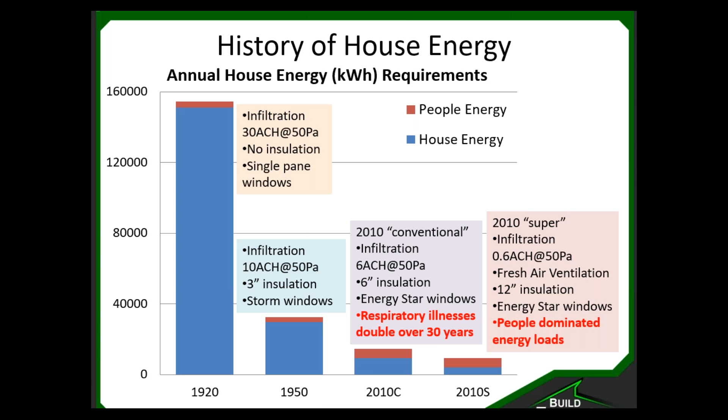Just briefly, and you'll find a lot more literature on health and productivity in our other reports, writings and presentations, but if all 100 million or so homes in the US, with roughly 325 to 350 million people, were efficient homes, and there's a lot of work to get there, the energy they would use per year would be about $160 billion per year, about half that for people, about half that for climate.

If we compare that to the costs of getting sick from the flu or from colds, or what asthma currently costs us spread over the populace in the United States, and then even more so poor air quality, which is pervasive in our homes. It is a myth that a leaky home is a healthy home, that it has good air quality.

Where the leaks occur and where you live are two different things, and our field research absolutely shows that where you live in a house, even if it is a very leaky house, most likely in the room where you're sleeping or spend the most time, the air quality is not good. Where it's good is in the laundry room or the mechanical room or the basement or somewhere else that has a significant amount of leakage.

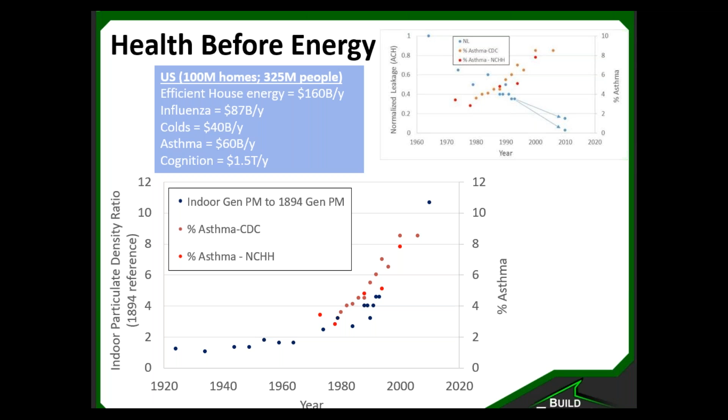And when we layer on a plot of how asthma has increased in our populace in the United States, since those records have been kept in the 1970s, we see that this trend maps out in direct proportion with that. And while we don't understand the direct cause, I think this correlation is very strong, indicating the importance of getting fresh air to keep ourselves healthy, and that these costs are every bit as significant as the energy costs that we'll talk about in this.

Now, one of the problems that we find as we do workshops and training sessions on designing homes is that it's complicated and it's hard to figure out where to start. Some people will tell you, just start working on the house, make it very well insulated and sealed, and don't worry about the other stuff. Do that first, independent of all the other things. But that is absolutely the wrong approach. The house is a system; in order to economically optimize it, you must consider all the factors simultaneously.

The type of water heater you put in, the type of appliances, the type of windows, the amount of insulation, the type of heating and cooling system. All of these things impact the optimization process. A house with electric resistance heating will have, when it's economically optimized, a different level of insulation thickness than a house that uses a heat pump. Why? Electric resistance heaters typically cost much less than a heat pump. A 1-ton mini split heat pump costs about $2,000 these days, while a similar capacity electric resistance heater you can buy for maybe 20 bucks at Walmart.

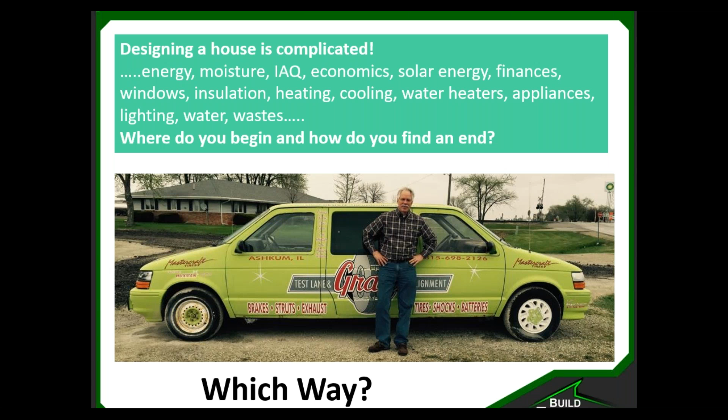So here's the 7 steps that we're going to be looking at. These steps are something that we've simulated in our Zeros modeling program, which stands for Zero Energy Residential Optimization Software. I'll talk a little bit more about Zeros. It's free software that we've developed over several years, and it's free to use. But regardless of using Zeros or some other software, whether REM rate, PHPP, Energy Plus, you can follow these same steps.

In the 7 steps, in order to have some perspective of where we're starting and where we end up with our net zero house, we're going to start with a conventional house. And because windows are a complex feature, letting heat pass in and out from winter to summer, as well as the radiation effect, let's look at what a house would do with no windows, and then if we covered the south facade of the house with windows. The real answer is somewhere in between, but we'll keep those in mind so we see energy performance wise as well as dollar wise. And I think some of you may be surprised, as many folks have in mind that windows are economic benefits to a home.

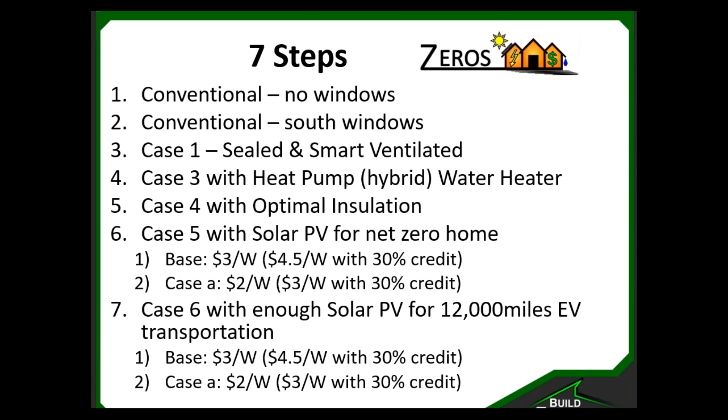My house, what we call Equinox House, we'll look at a few features of it. The name Equinox House: this uprising overhang on the 6/12 pitch roof where the clerestory windows are, on the equinox, and within 2 weeks of the equinox, that overhang edge goes, in the spring, from allowing full direct solar radiation into the main living area and master bedroom area of the house, to totally excluding the direct sunlight.

And the direct sunlight is about 85% of solar radiation on a clear day. That 15% blue sky light that comes in from the spring equinox to the fall equinox, when the direct sunlight's excluded, that's more than enough to daylight the inside of this house, and to make it so that you can comfortably read throughout those rooms in the house.

This house has less than 10% window to floor area. It is one of the best daylit homes, if not the best daylit home I've ever lived in, as well as walked through. And it does it without glare. It does it without frying you somewhere in the house. It's just very comfortably daylit.

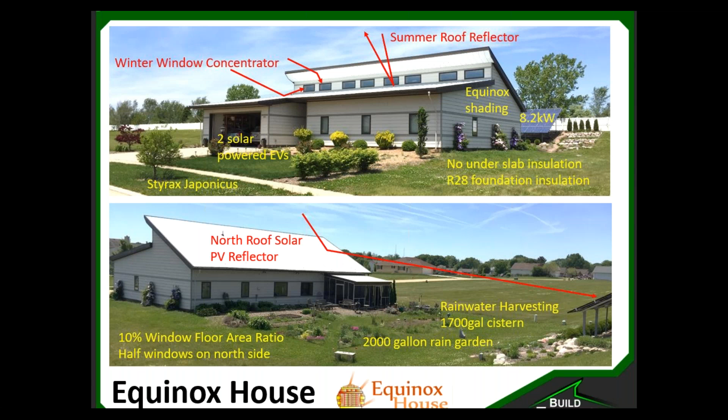And as I mentioned, we have 10%, 2,100 square foot house, 180 square feet of windows, and the house is wonderfully daylit. And then we have as much north-facing window as we have south-facing window, and that's because our gardens and the direction we want to look is to the backyard.

Now, what I'm telling you and the steps that we're following, I'd like to say that we're innovative and this is new, but you can go back to the 1970s, and at the University of Illinois, the Small Homes Council and Building Research Council developed what was called the Illinois Lo-Cal House. This is really the origin of many other super insulated homes to come, such as the Passive House, which as you look at their archive material, you'll see that this was definitely a house that they referenced.

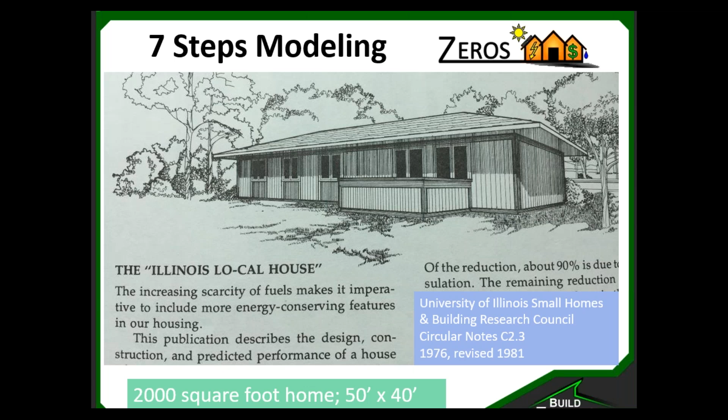And what we're going to model looks very similar to this simple ranch home, about a 50-foot by 40-foot, 2,000 square foot home as we move through these steps. This is a Lo-Cal house in reality. This is in Urbana and was built in the 1970s by my colleague, Michael McCulley. And he designed this house. And just a couple of years ago, I stopped by and talked to the residents who just thoroughly love the home and have loved very, very low utility bills ever since they've lived in it.

Aesthetics are important. Our expectations in what we would like in a home. We do like to see out. We do like daylight in a home, and those things are important for us. And so even though a window may not turn out to be good from an economic balance, just like many other things that we buy, it's something that we like, and we should be able to have it if we can afford it and if we want it.

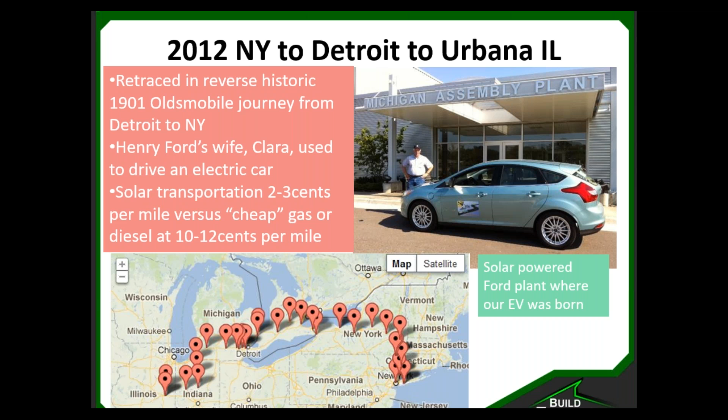And this car cost about $40,000 at the time, now moving down to about a $30,000 cost. Just like flat screen TVs, it's going to be less expensive than the thousands of parts that are in an internal combustion engine. And as a native Detroiter, I think this is going to be good for our industry and our overall economy, as well as our pocketbook economy.

The solar system for Equinox House is an 8 kilowatt system. And just a couple things on that. It cost about $4.50 a watt to put it in then. Now you can put it in for $3 a watt. And if you're a do-it-yourselfer, you can do it for $1.50 a watt. This 8 kilowatt system, about 700 square feet.

It produces about 10,000 kilowatt hours a year, about 8,000 for the house, and about 2,000 for the car. And the current generations of electric vehicles, you get about 3 to 4 miles per kilowatt hour. So 2,000 kilowatt hours is going to give us about 6,000 to 8,000 miles of driving a year. And you can see roughly how that proportions over this photovoltaic system.

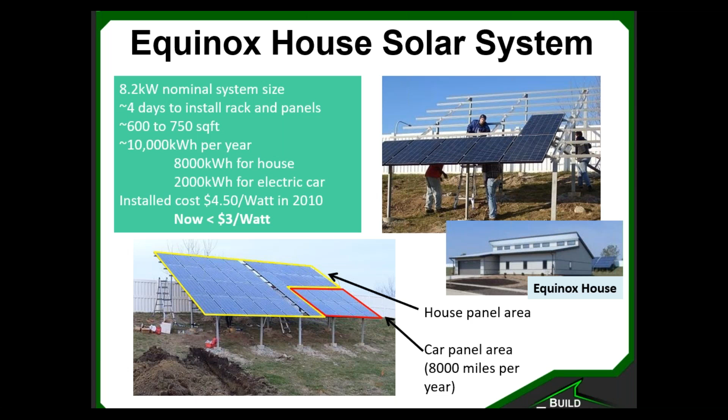There's a lot of student classes, architectural and engineering classes around the country that are using this for zero energy house design modeling. It's very easy to get up and going on. And there's a PDF that follows through these 7 steps in more detail than this webinar, along with a CSV file that you can import into Zeros so that you can actually see all the details of the results that we'll be discussing in a minute.

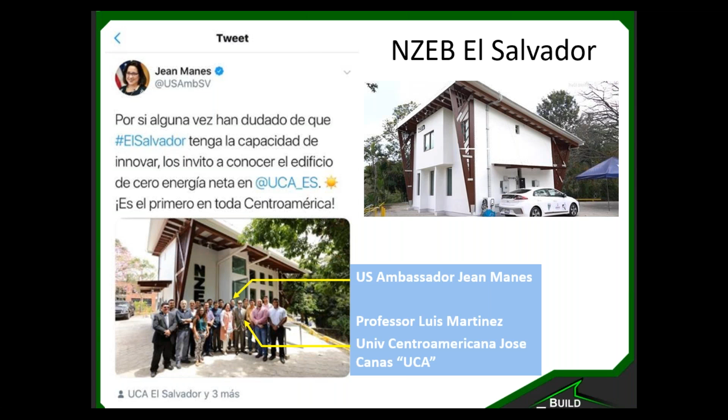And because I'm very proud of Luis, who's now a professor at Universidad Centroamericana in El Salvador, here's a recent picture from just a couple of weeks ago of Luis along with the US ambassador at the net zero energy building project that Luis has been leading at UCA, his university campus. That's a beautiful, gorgeous building that will provide them with lots of data and hopefully help start paving the way to a better future for El Salvador.

Then finally, just simulation versus reality, so you can use Zeros with confidence. These blue dots are the average performance of 13 identical homes. These are manufactured homes, Vermod homes that were built in Vermont and are largely in Vermont. And these homes are averaged throughout the year, with over 2 years of data collected. It takes a lot of time and a lot of data to be able to statistically average so that you can compare with a simulation model.

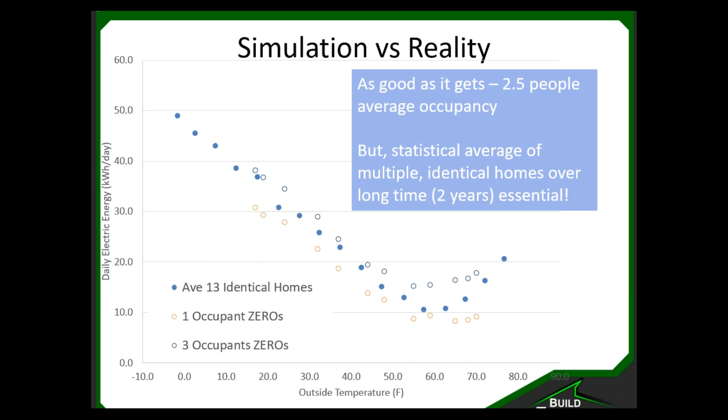And if we run Zeros with 1 occupant versus 3 occupants, you can see that 3 occupants increases the energy usage. And the average of these 13 homes was about 2.5 occupants. So you can see very, very good agreement between the daily energy requirement in kilowatt hours per day versus outside temperature. Just looking at when it's 20 degrees out, one of these homes would use maybe 30 or so kilowatt hours per day. We're talking about $3, $3.50 worth of energy, the price of a cup of coffee. So these homes use very, very little energy, and we can predict it very, very accurately.

I also, though, want to point out one of the problems when you look at comparisons between simulation models and data. This is what that data really looks like, all of these solid points. The yellow points are the simulation predictions. If I happen to compare the simulation to one of the very low energy usage homes, I might reach a different conclusion than if I used one of the homes that uses quite a bit more energy.

And so all of those data points are what were averaged at a particular level of temperature to give the previous plot. And in perspective, those open circles that go up sky high are performance values for conventional homes, just showing you how much more energy they use than these Vermod homes, which are net zero energy buildings. So the range of people usage in these homes is very significant, as we mentioned, and on average, Zeros can predict it.

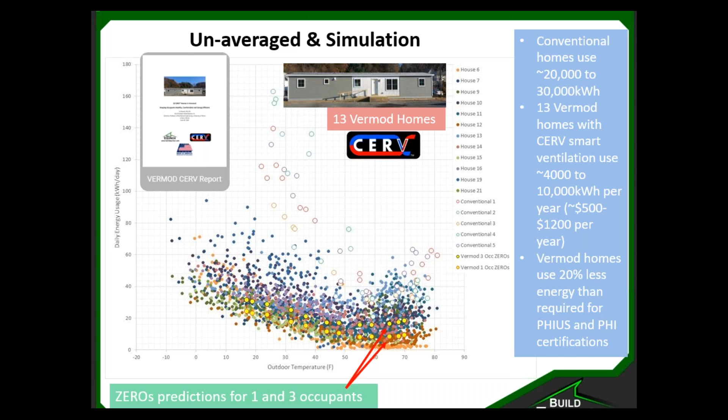This is one of the main output sheets on Zeros, and not to go through much detail on it, but I do want to point out the life cycle cost. So this is for the conventional home that we're starting with, about $412,000 of life cycle costs. That's the cost of the house, which is estimated at about $213,000.

$200,000 of that is the base cost, or estimated to be $100 per square foot cost, which is typical for our area. And then the things related to the energy performance of the house, the cost of insulation, the cost of heating, cooling, ventilation, equipment, and utilities are the other factors that add up to the life cycle costs, along with then replacement of, say, for example, the heating and cooling system every 25 years, that would be replaced over a 100-year lifetime. The red and green arrows are direction arrows to help guide you to optimum levels of insulation thickness in the walls and the roof and window and hot water.

Of course, the less hot water you use, the better. The less electricity people use, the better. The fewer occupants, the better. The thicker the wall, the less energy, but at some point, the higher the life cycle cost. And then other output results related to the heating cooling capacity of the system.

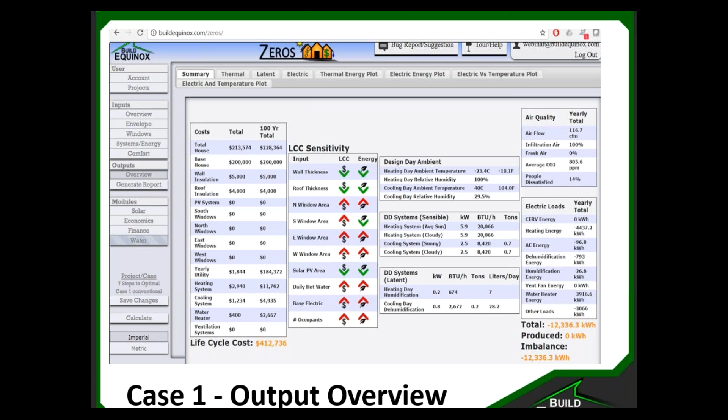So let's look at these results, and so these cases are laid out, and as you use those cases with zeros, you should find these same numbers, and for sure contact me anytime for any questions related to them. But first, starting with a conventional home with no windows, as we just saw on that sheet, we'd use about 12,000 kilowatt hours of electricity, this blue bar. And if we put windows on the south side of that house, which would be 500 square feet of good Energy Star windows, not super windows, but good performing windows, we can see that the energy usage would drop a bit below 12,000 kilowatt hours, but not by a substantial amount, especially for adding 25% windows to the south. And so the reality for, say, a house with 12% windows will be somewhere between those two.

As we seal the house up and then add a smart ventilation system, there is a significant drop, almost 2,000 kilowatt hours just by sealing this house up better. As we add a heat pump water heater instead of an electric resistance heater, and I think I forgot to mention that we have 3 occupants assumed in the house. That's about 50 gallons of hot water per day of usage. And by putting in a heat pump water heater, we see a similar nearly 2,000 kilowatt hour drop of energy per year.

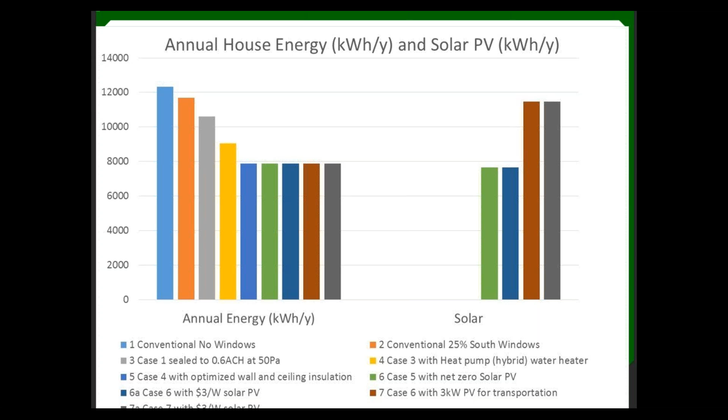As we go to putting in photovoltaics, cases 6 and 7 do not impact the energy performance, but over on the right-hand side, we see that in case 6, where we're just meeting the house electric needs, we're going to match that with a solar system. And if we also want to add about 12,000 miles of driving, we would put in about 3 kilowatts of solar PV, which would give us close to 4,000 extra kilowatt hours per year, and that would be about 12,000 miles of driving.

If we look at the house costs, our conventional home, figuring it would be $100 per square foot, and I know you folks in California and New York and other metropolitan areas are saying, we can't build a house like that. Well, it just scales, but this base house, whether it's $200,000 or $600,000 without any energy features, does not impact the optimal house solution. So that is just a reference cost, and all the energy related items then vary on top of that. The insulation thickness relative to the climate, relative to the cost of electricity and solar panels.

The main thing to notice here, between a windowed house and a non-windowed house, there's a significant cost difference. I've assumed $45 a square foot, and for good Energy Star windows, you might find those at $30 to $60 a square foot. Super windows, maybe $50 to $100 per square foot, things that are reaching like R6, R8 type thermal insulation value. So there's a significant cost difference due to windows. And as I mentioned, pick what you need for the views you want, for the look that you want, and the aesthetics. As we look at life cycle costs, you'll be able to see the impact due to those aesthetic preferences.

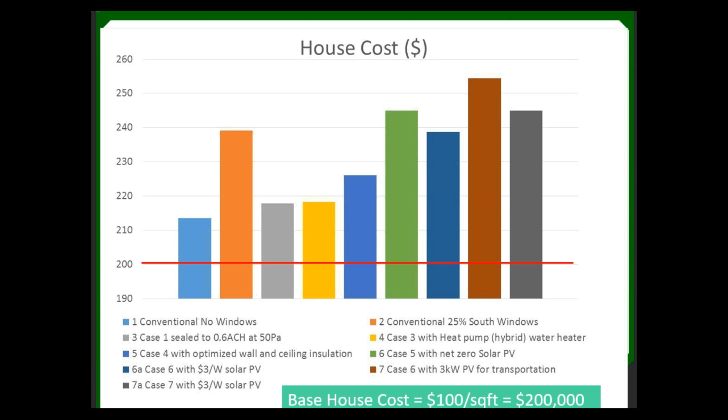And then adding solar. If it's $3 per watt versus $2 per watt, now 6A where I have $3 per watt, that's then with an assumed 30% tax credit, taking it down to $2 per watt. So basically between the green and the blue bar, we're looking at $3 a watt and $2 a watt installed solar cost. And then adding an additional 3 kilowatts for transportation, you can see that our house cost, what you're going to amortize if it's written into the cost of the house, is going to increase relative to that.

When we look at the utility costs, starting with the conventional house, as I mentioned, windows can reduce utility costs in northern climates. It's just that it does not reduce it enough to pay for the costs of the windows. And these are south-facing windows, so east, west, north windows are not going to have this utility benefit.

But as we look at the change of utility costs going to a sealed home with smart ventilation, we see a substantial drop in utility. Going to the heat pump water heater, another similar substantial drop. Optimizing the insulation thickness, another significant drop. And then adding solar to make us net zero.

Now, the reason that doesn't take us to zero utility costs is that I've assumed a $20 per month customer service fee. So we're not getting off the grid, we're staying part of the social fabric of the community and contributing excess energy when we have it and then drawing from the grid when we need it.

As we then add additional solar for transportation, though, we do go negative because, as I mentioned, solar-powered electric vehicles cost 2 to 3 cents per mile relative to a good-performing gasoline engine car, a 30-mile-per-gallon car, costing about 12 to 13 cents per mile. So when your mileage shifts over to solar-powered electric, you now have an actual dollar savings in your pocket over the course of the year.

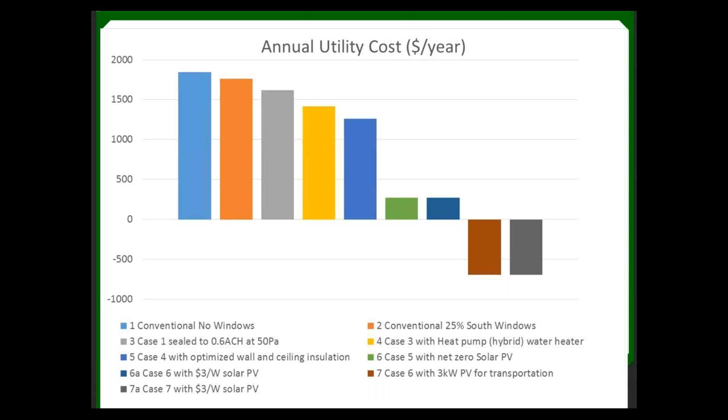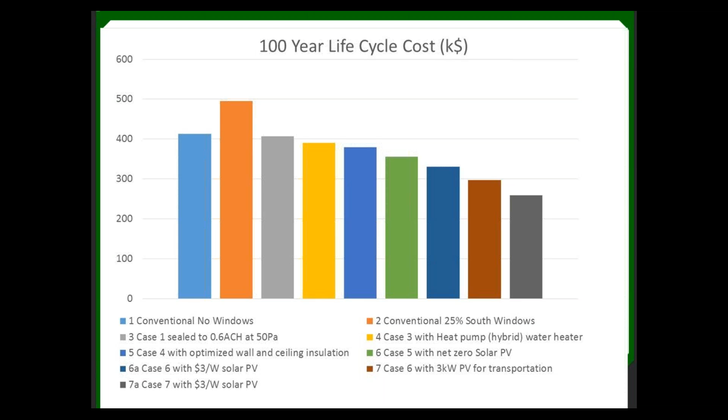But we also want to know, even though the house may have the best life cycle costs, best lifetime costs, what's it going to cost us per month to have this net zero home with solar powered transportation? And looking at our conventional home and the mortgage, taxes, insurance, utility, and within those ZEROS data sheets, you'll be able to see what I've assumed for insurance and tax, about $600 a year for insurance, for example, and then a tax rate that's typical of our community, which isn't that inexpensive as far as taxes, but you can see how that is coupled with those costs, and then the utility costs.

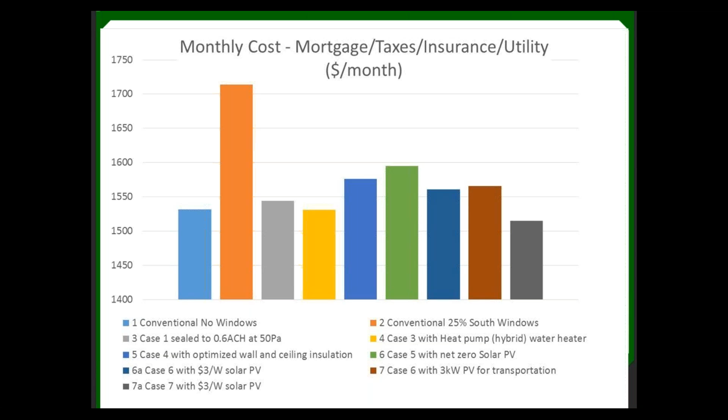But basically you see that the solar powered house with transportation, whether you have $3 per watt or $2 per watt installed solar costs, is within $50 of the conventional house. And the solar powered house has much better air quality. It's a much healthier house, as well as being much more stable as far as future costs, not relying on low escalation of utility prices. And the windowed house, the amortization of the windows does add a substantial increase to that house cost.

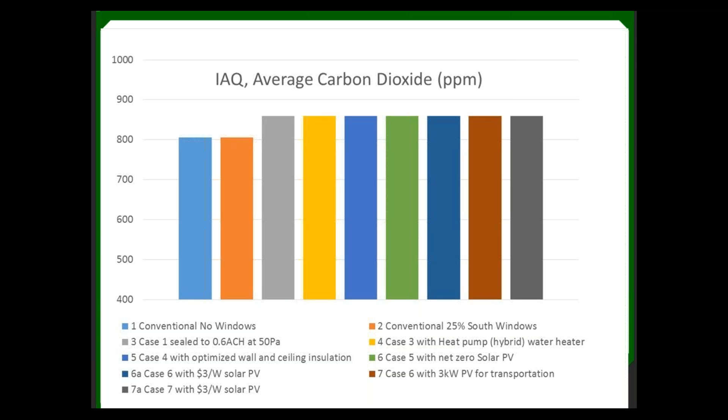As I mentioned, carbon dioxide, even though it appears low for the conventional house with a 7 ACH infiltration, and in sealing the house to like passive house levels of 0.6 ACH, the smart ventilated home distributes fresh air to where people are, where the leaky, haphazardly ventilated home does not.

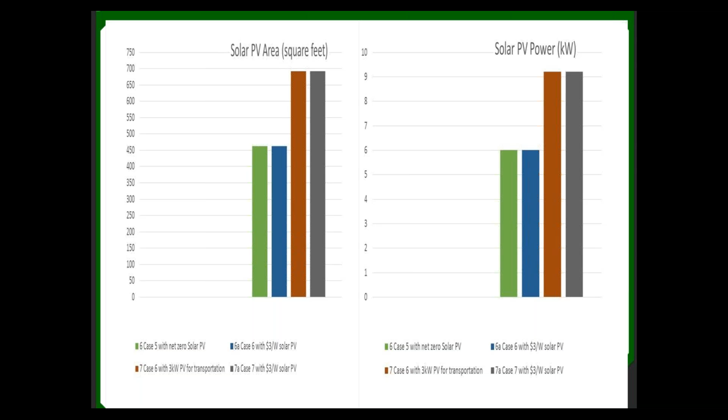As far as solar PV area, we're talking a fraction of the roof space, more typically having solar added to a roof, so about 500 to maybe 700 square feet, depending on if it's just powering the house or powering the transportation. The extra 200 square feet for powering 12,000 miles of driving, you could also think of as basically being about the area of the garage space that the cars are going to be kept in. And we're talking solar systems in the range of about 6 to 9 kilowatts, under the 10 kilowatt level that several utilities throughout the country consider to be the maximum they would allow on a residence.

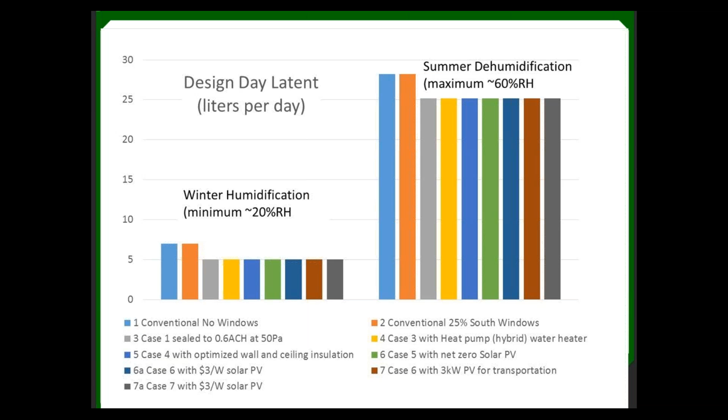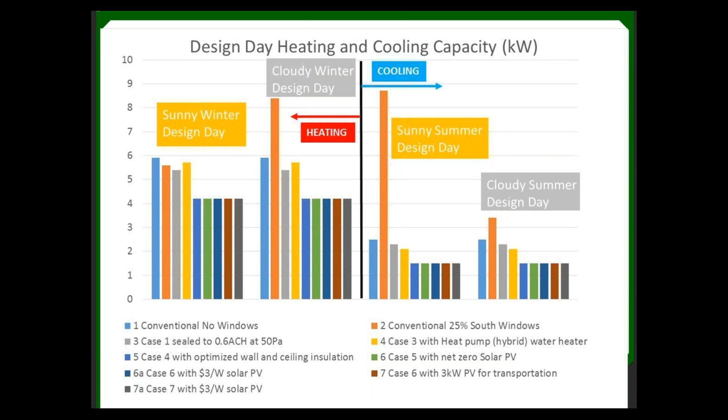And one other comment as far as heating and cooling capacity, and this will, we're at the end here, and I apologize for going over.

We're in an era where, as I mentioned, humans are significant factors in the energy used within a house. In an analogous manner to old cars versus today's car, an old car running at highway speeds had more than enough power because of the inefficiency of that vehicle, the weight of the vehicle, the drag coefficient of that car, that when it needed to accelerate from zero during city, stop-start type driving, it had more than enough power inherent in it for driving at highway speed to reasonably accelerate up to the speed you'd like to go.

But newer cars, being lighter weight, much more efficient, and much more aerodynamically designed, if you only put in the power needed to drive at average speeds, you would not have enough power to reasonably accelerate to where you would be happy with the car, and other people riding with you or driving behind you would be likely to go into road rage as you barely creep up to highway speed. So there's an amount of power needed in a car just for it to reasonably accelerate, and that now is typically greater than what's needed just to keep the car running at a steady speed.

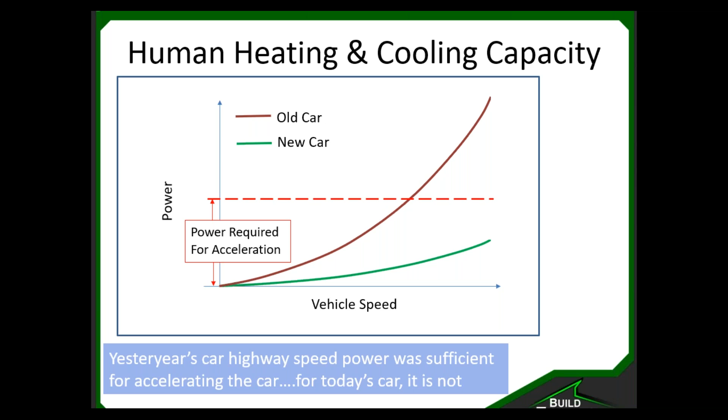Today's homes are similar. So when you use Manual J or other methods to look at the capacity of the heating and cooling system, you would go to the winter design temperature, often what's called the 99% or 99.6% design day, a day that's extremely cold in the winter, much colder than the average January temperature. In yesteryear's home, with this steeply sloped red line, that heating requirement was so much more than what people need for moving a house from one temperature to another that it was enough for sizing the heating and cooling system.

So what I'm trying to show between that steep red line and the dashed red line is that if you move from that design day condition over to the average winter temperature, the capacity that went with that design day was greater than what would also be needed for people's preferences, what we often call 3 sigma design. You take the general populace, go 3 sigma out in variations of the temperature people would like in their home, how much they move the temperature up and down, and you would find that you have enough capacity to accelerate the house up or down in temperature, whether you're in summer or winter.

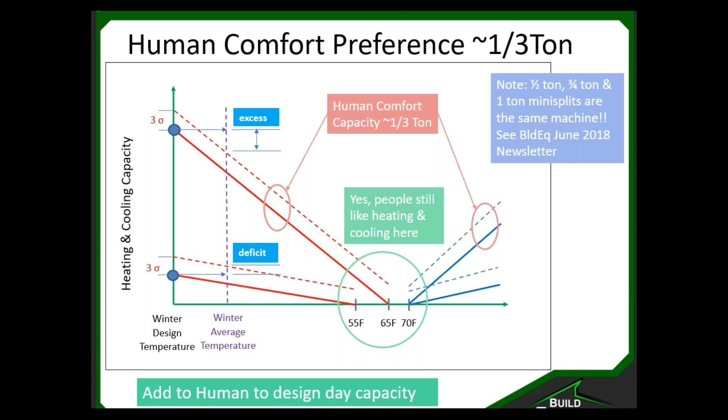So while people have a fear of overcapacity and inefficiency, that is absolutely not true with today's mini splits. 2 mini splits operating at half capacity are more efficient than a single mini split operating at full capacity. There's no ifs, ands, or doubts about it. This is from real data, real laboratory experimentation. So don't be fearful about adding $2,000 for a 1-ton mini split to a house. It's going to operate great at partial load. It's going to be 1% of your house costs if your house costs $200,000. And so do that, and you're going to reduce callbacks due to comfort issues.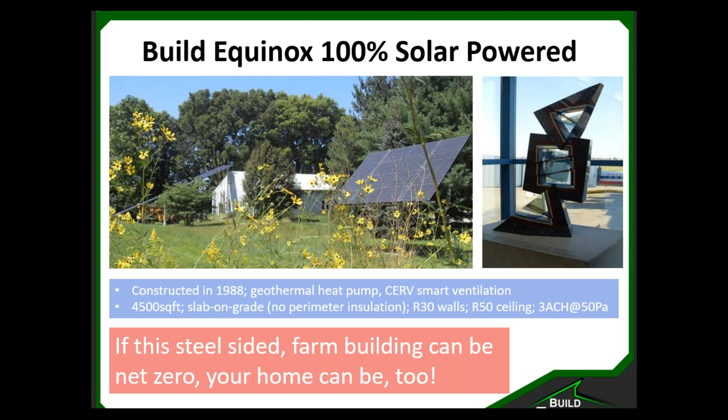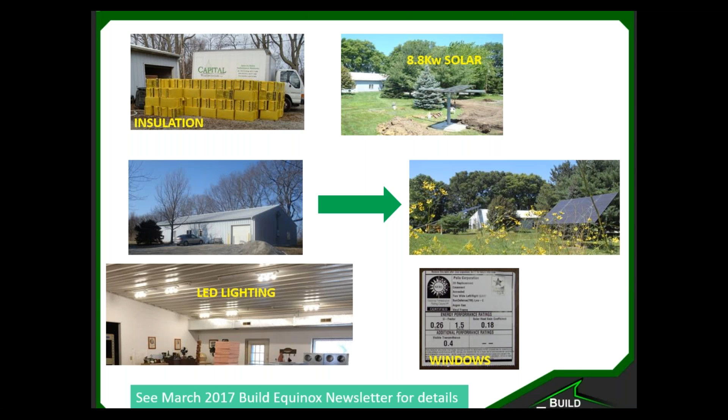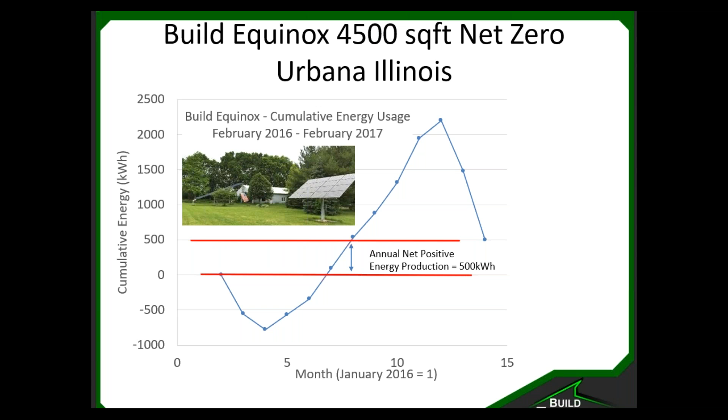I'm just going to say that this 4,500 square foot Morton building is net zero powered. If this building that I'm talking to you from can be net zero powered, surely the homes that you're working on can be as well. Took a little elbow grease, some insulation, some solar, some LED lighting, some improved windows, but there's absolutely no doubt that here from this data in February 2016 to 2017, we ended up with a net positive 500 kilowatt hours. So we can do this. We can do this throughout the country.

Our weather here in Illinois is some of the worst in the country because we get hot, humid weather from Houston and New Orleans coming up in the summer, and we got Arctic blast from Minnesota coming down in the winter. These new technologies, the low temperature air source heat pumps, geothermal heat pumps, new ways to economically seal, and then the new era of smart ventilation, hybrid water heaters and clothes dryers, optimized insulation and solar PV. And if you have to cut down trees, don't; buy into community solar or community wind farms in order to have renewable energy. But you're going to lower your energy usage and have a healthier home.